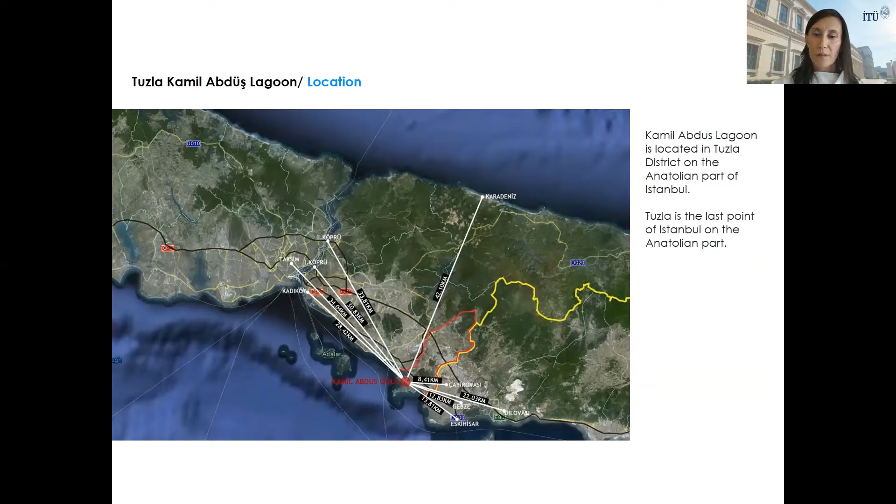So I will start with the location to understand the site better. Kamil Abdüş Lagoon is located in Tuzla district on the Anatolian part of Istanbul. Tuzla is the last point and the periphery of Istanbul on the Anatolian part. You know that Istanbul is a two-sided city. So actually it's a really special lagoon, which is one of the few lagoons in Istanbul.

But after the building of Tuzla shipyard just next to the mouth of the lagoon in 1978, and the change of the bed of the stream which provides fresh water for the lake, it quickly lost its ecological values, and the lake dried up in, unfortunately, 2003. That's why this area is a lagoon filled only by seawater, and it's struggling to survive despite all the environmental problems it has experienced.

And the other important issue is related to this lagoon, the lake. The lake is on the bird migration routes, so it's a frequent destination for birds. That's why one of the most concerning parts of this project is this bird population. But after the shipyard was built, the number of bird species observed in the lake decreased from 45 to 22.

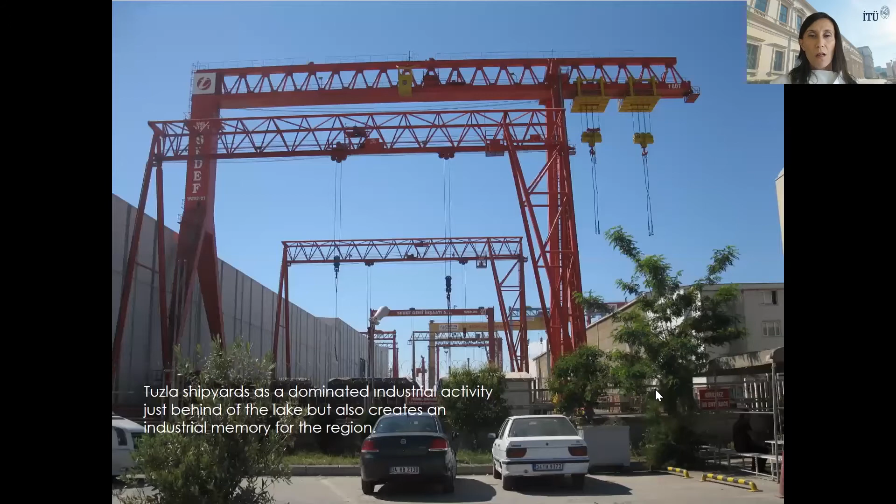I put some photos from the site to understand the condition better. Just behind the lake, you see the Tuzla shipyards as a dominating industrial activity. This industrial activity creates unecological conditions, but also creates an industrial memory for the region. So in the design process, we used this industrial memory as a design input, which I will show you later.

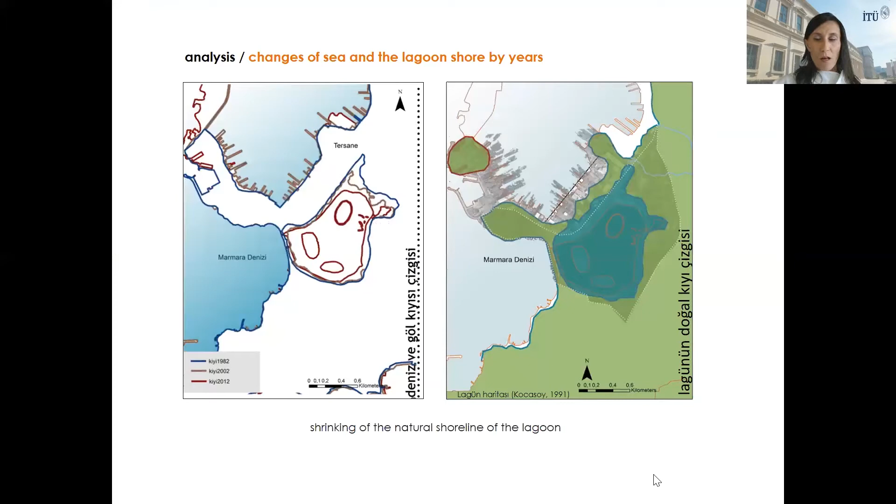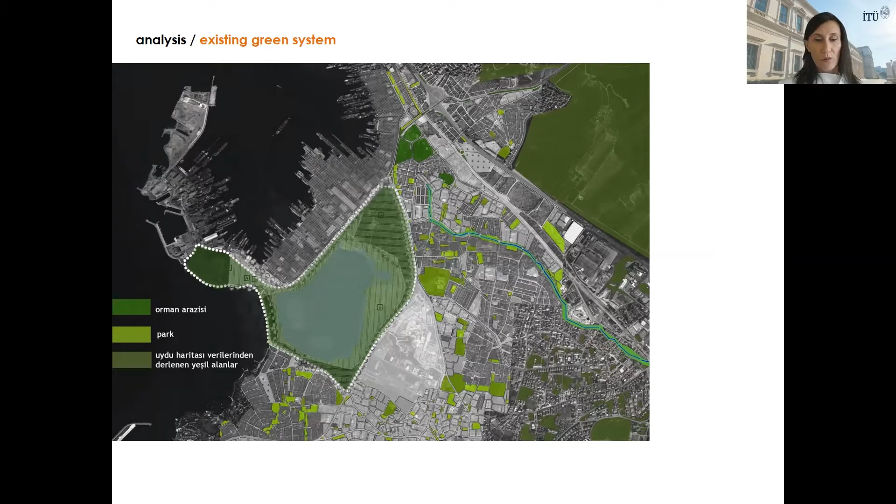After many detailed ecological, social, and physical analyses, we designed decisions and zones. In order to rehabilitate the lake ecosystem, it was necessary to understand the entire green and blue infrastructure of the surrounding environment. That's why we created a green infrastructure proposal based on the hydrological cycles of the area, which will ensure the sustainable preservation of the ecological values of the lagoon in the future.

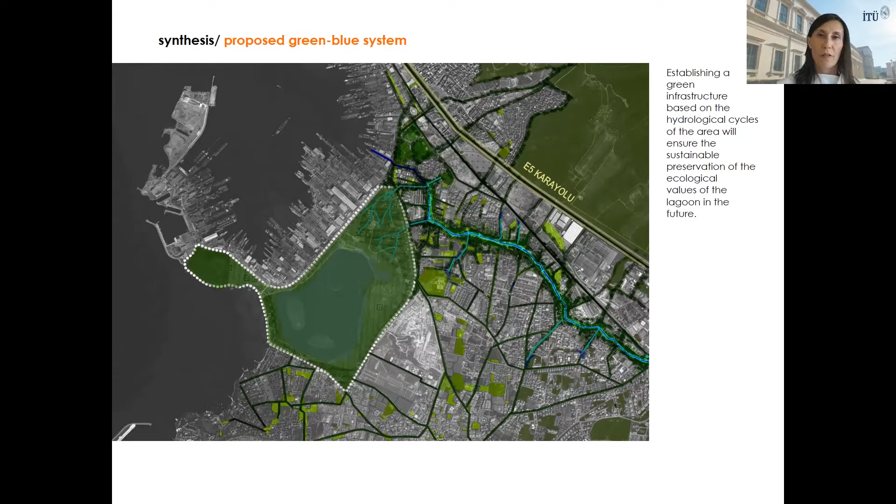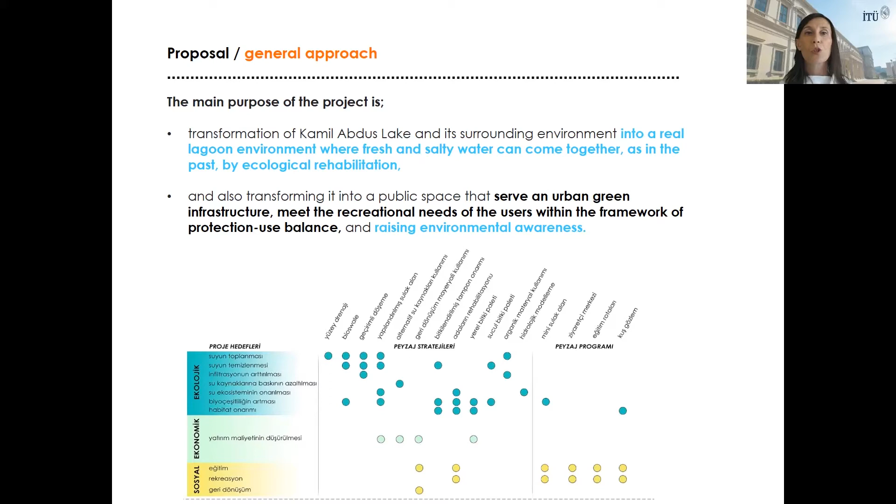As a general approach, we propose the transformation of Kamil Abdus Lake and its surrounding environment into a real lagoon environment where fresh and salty water can come together, as in the past, by ecological rehabilitation. But we would also like to transform it into a public space that serves as urban green infrastructure, meets the recreational needs of the users within the framework of protection-use balance, and raises environmental awareness.

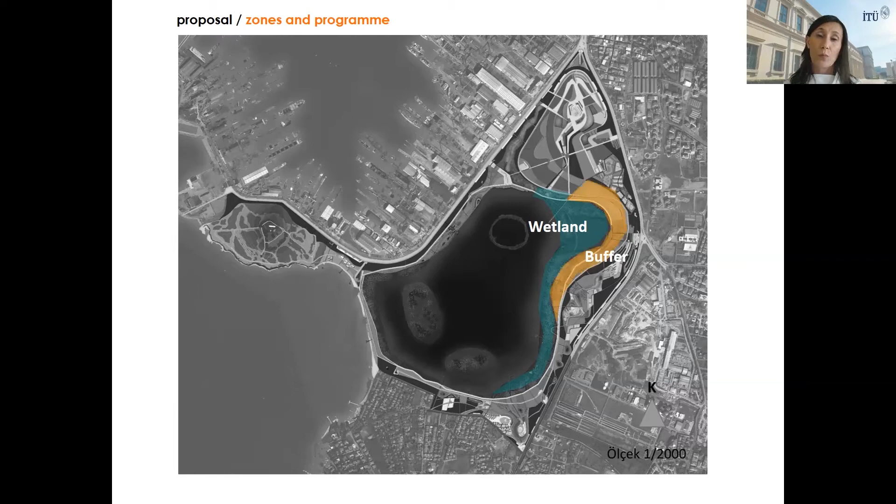So after that, we created the design zones according to this analysis. The most protected zone is here, the wetland, of course. We protect the wetlands, and then we create a buffer zone to protect these wetlands. And then we put maybe the most active part of this project, the park, after this buffer zone. And then we create different park types according to user profile.

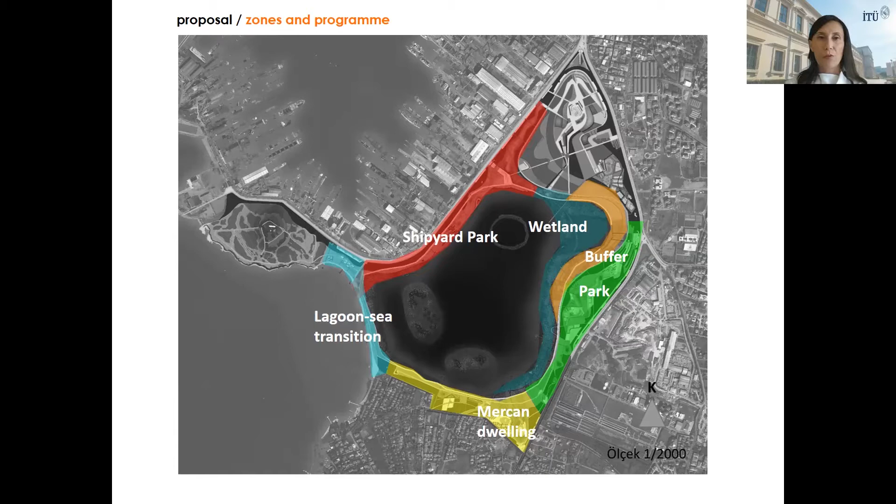For example, Shipyard Park is mainly for the shipyard users and workers, and Mercan Park is for the Mercan dwelling users. The other important part is the lagoon-sea transition part, because here is where the salty water enters the lake, and we worked with the environmental engineers. And the other most natural part is Pistacia Island, because there are lots of old Pistacia trees here. That's why this island is under protection.

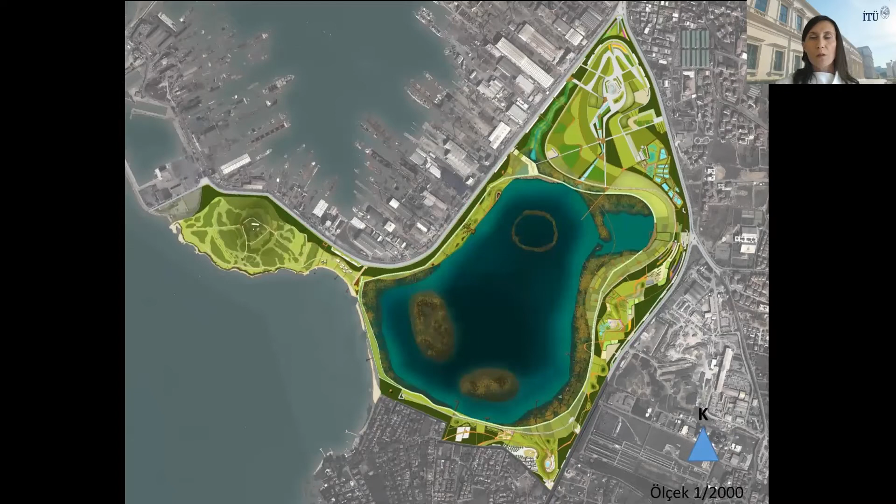The square is the most built and the most active part of this project. And the bird islands: these islands are just for birds, no human use allowed. And here you see the 1/2000 master plan of this project.

One of the most important issues in this project was water management. With this system that you see in this image, we have both cleaned the water and provided the balance of fresh and salty water. That's why we created different types of water management systems, such as infiltration, stormwater management, water collecting canals, and bioswales to collect and rehabilitate the water.

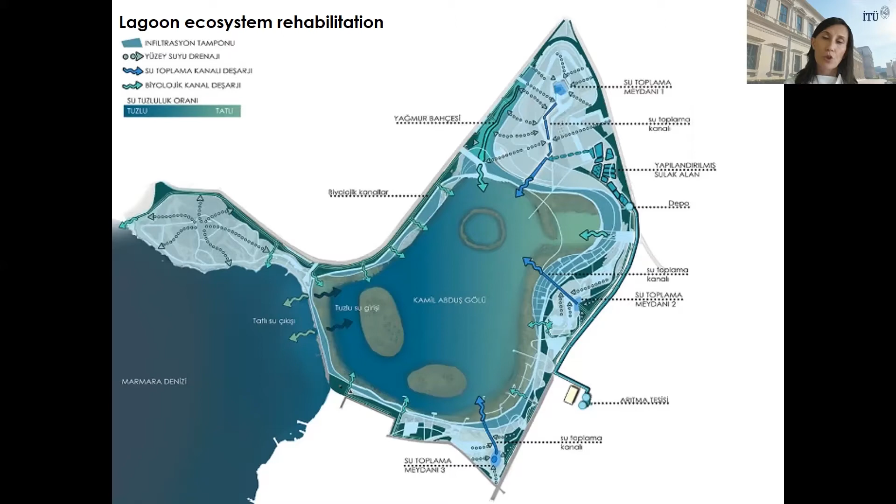So we combined all these different systems in one water management plan, to clean and then recharge the cleaned water to the lagoon ecosystem. Maybe the most important part of this water management system is the constructed wetland. Here we transfer the water, clean it, and transfer the clean water to the area. Here you see the zones of this cleaning system.

In zone 1, there are sedimentation and ventilation pools. In zone 2, heavy mineral decomposition pools, and zone 3, nitrate decomposition pools. In zone 4, the water is totally cleaned and conditioned, showing the clean water to the visitors. So the last one is the water show area, where visitors can see the totally cleaned water.

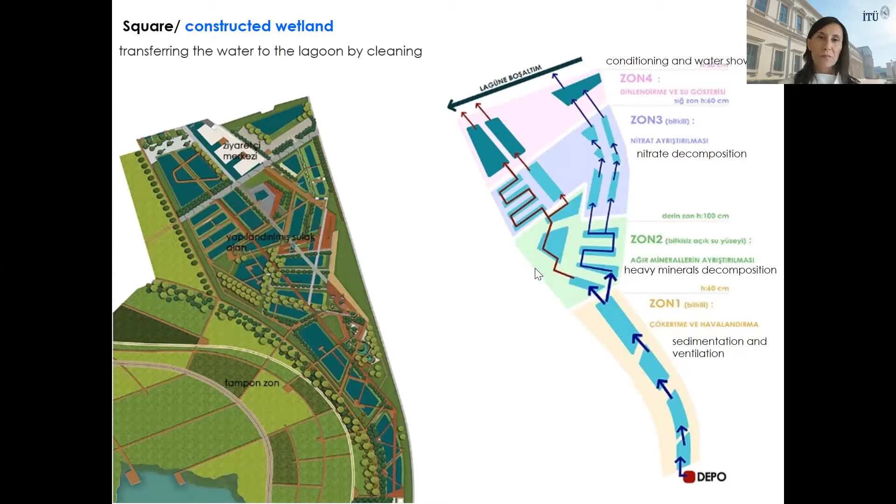The other important thing, maybe the most multidisciplinary part of this project, is that we created a hydrological model, thanks to hydrologists and environmental engineers. With this modeling, we try to balance the salty and fresh water amounts in the lake.

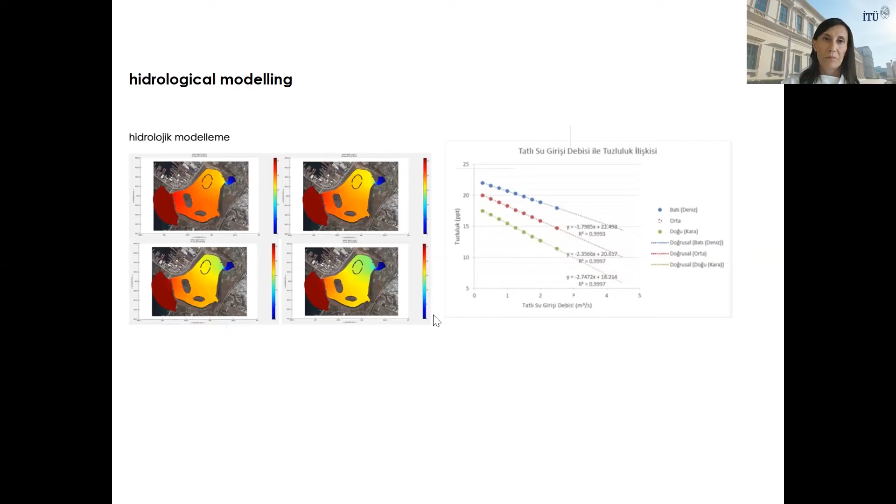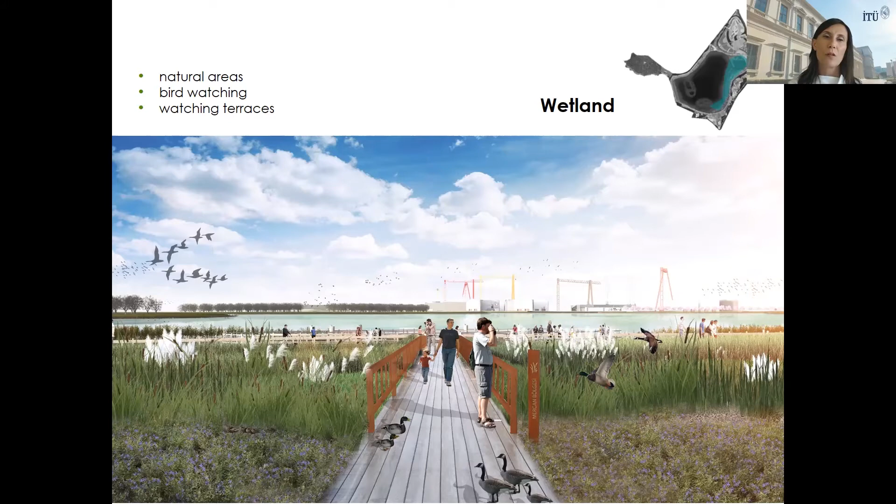Here you see the programs of the park in different zones. Now we can pass through these zones with the images and the programs. Here is the wetland part, the most protected part. This part is just for birds and the natural wetlands. So there are some natural areas for birds, and then we created some bird watching areas. Visitors can come and watch birds from these terraces.

The other part: remember that after the wetland and buffer, we created a more active park. The most important theme here is recycling, because of the industrial activity here there are lots of unused industrial materials, and we recycle them and use them in the park. Here the program is more active: you see in the list thematic gardens, resting areas, thematic meadows, cafes, restaurants, kids squares, sports areas, and cycling, running and walkways.

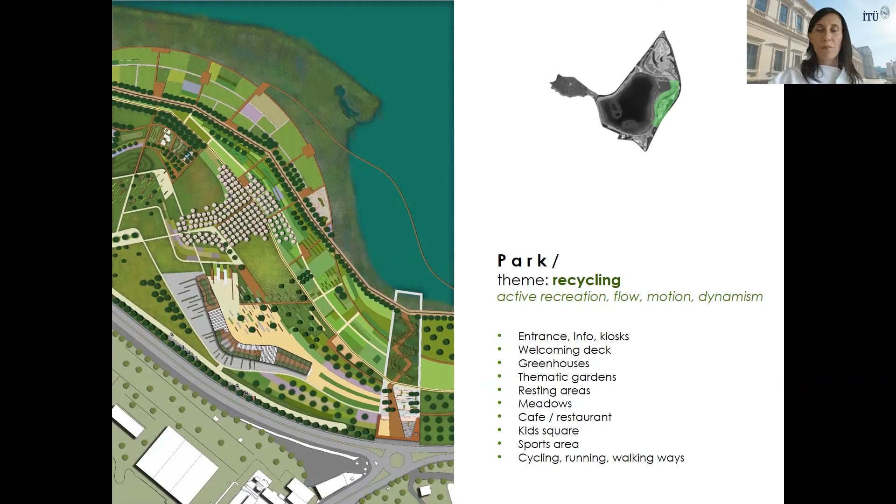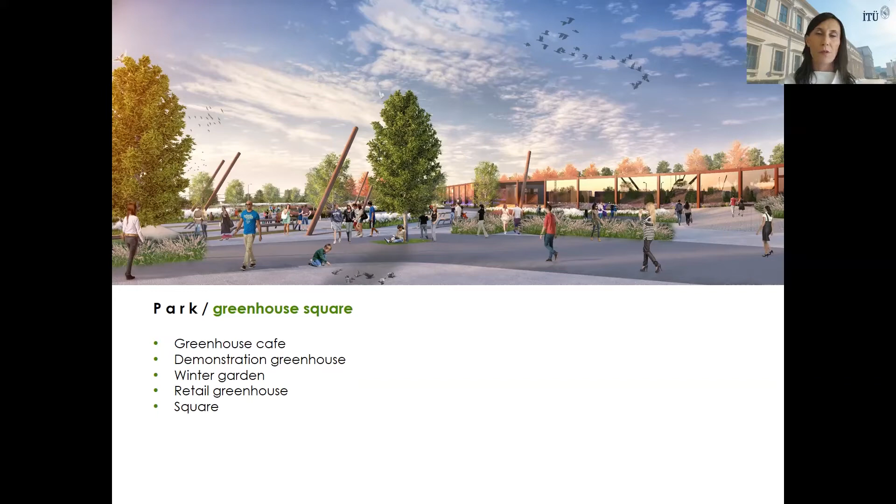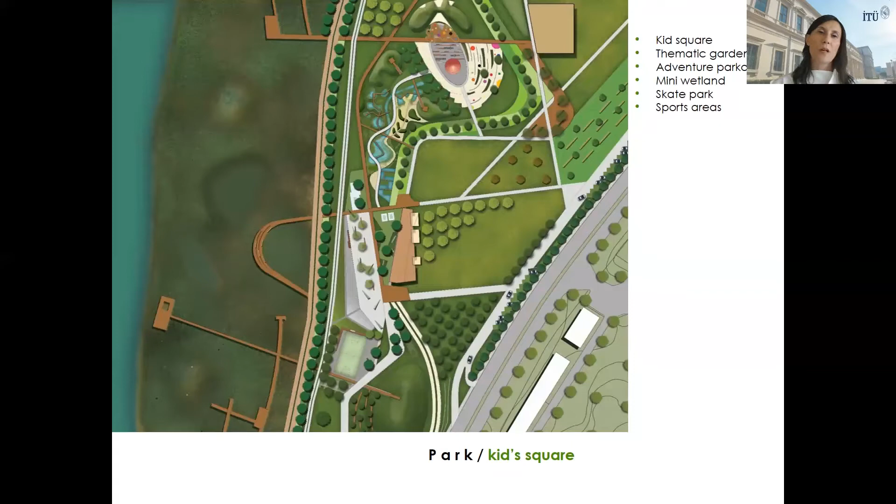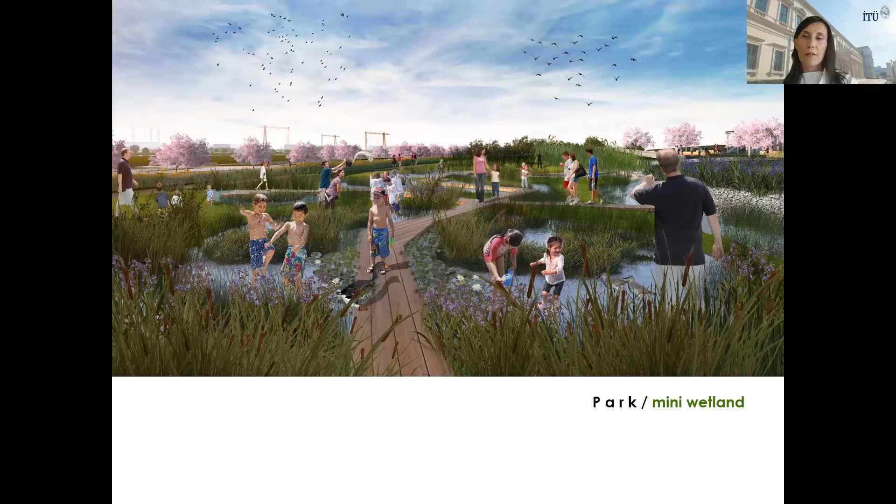Here you see the kids square, consisting of some thematic gardens, adventure parks, mini wetlands, a skate park and sports areas, because it's one of the most active parts of this park. In order to understand and rehabilitate the lake ecosystem, it was necessary to understand this whole system. That's why we create real mini wetlands to raise ecological awareness and promote wetland ecology for children in the kids area.

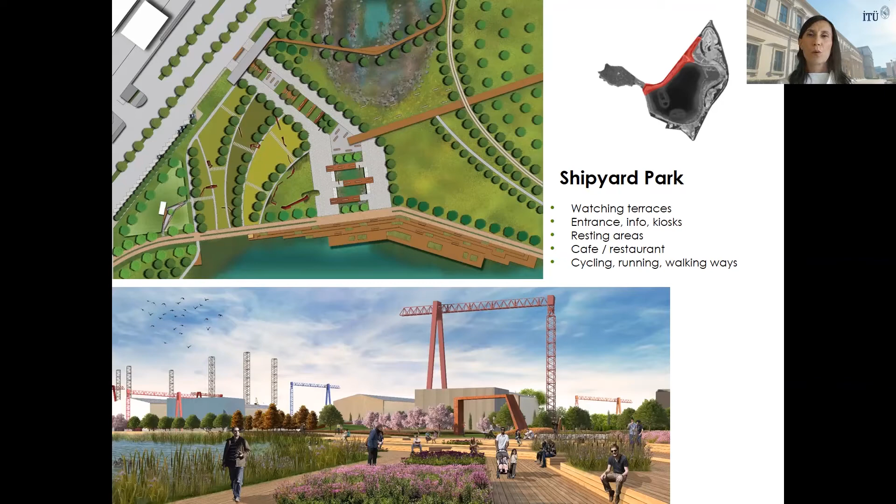Another zone is the shipyard park, just next to the Tuzla shipyard. Here is calmer than the active park zone because of the user profile. So we program here watching terraces, an entrance info kiosk, resting areas, cycling, running, walking, and maybe some small cafes and restaurants.

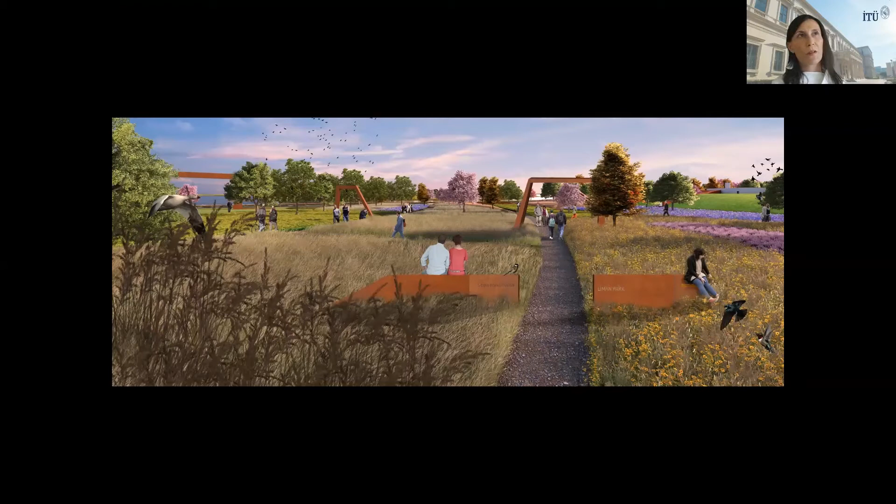Yes, this is the industrial memory that you can see in the park identity. We use recycled materials, corten or some shipping materials, on the site, keeping this industrial identity and memory on the site. You see some natural playground images here in Shipyard Park.

And the other zone is the Mercan dwelling park. Here is a kind of two-story dwelling. So we create some small area for this dwelling, because the whole site is quite big, and we should create different zones in the park for different user profiles.

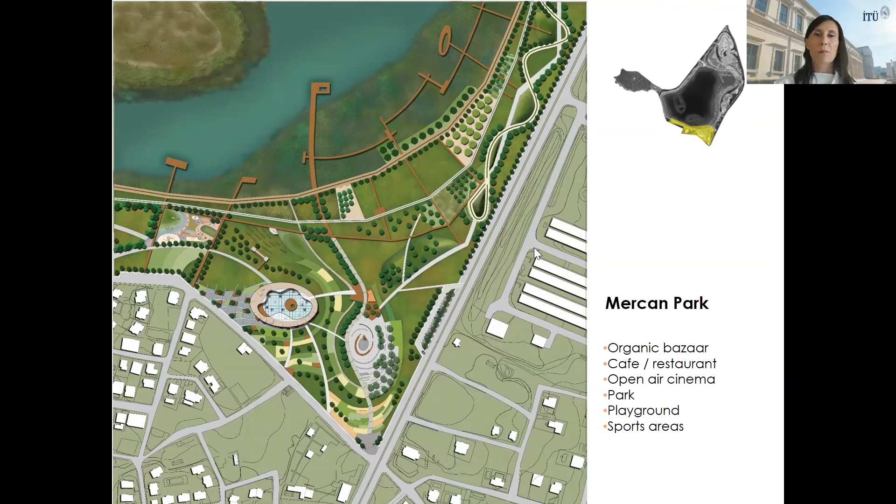In Mercan Park, you can see the classical park functions, but we also create some organic bazaar functions because of the old greenhouse cultivation here. Mercan users are quite familiar with buying organic foods. That's why we create an organic bazaar here, and cafes, restaurants, and of course some classical park elements, playgrounds, and sports areas. Here is the Mercan Park Square and the organic bazaar shelter.

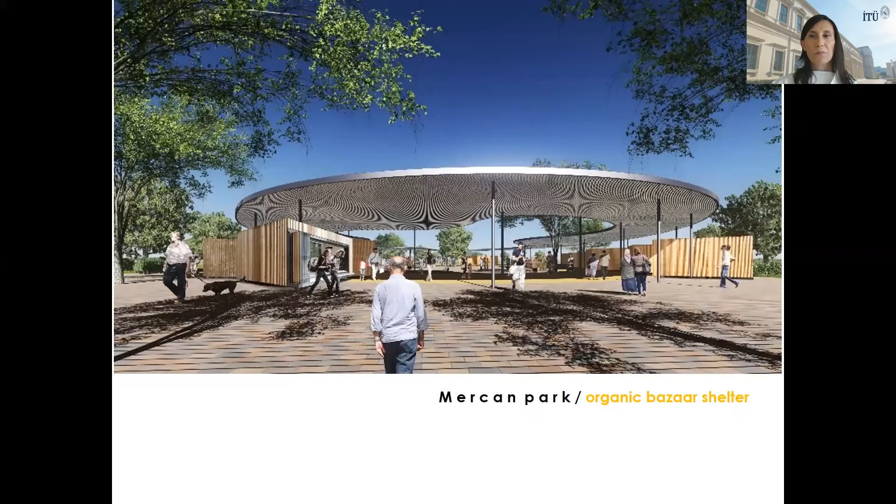This part is the crossing part of the lagoon and the Pistachio Island part. Here we work with the environmental engineers because of the balance of the mouth of the salty water entrance to the lake. So it's kind of an engineering project, but of course we also join this part as the recreational part.

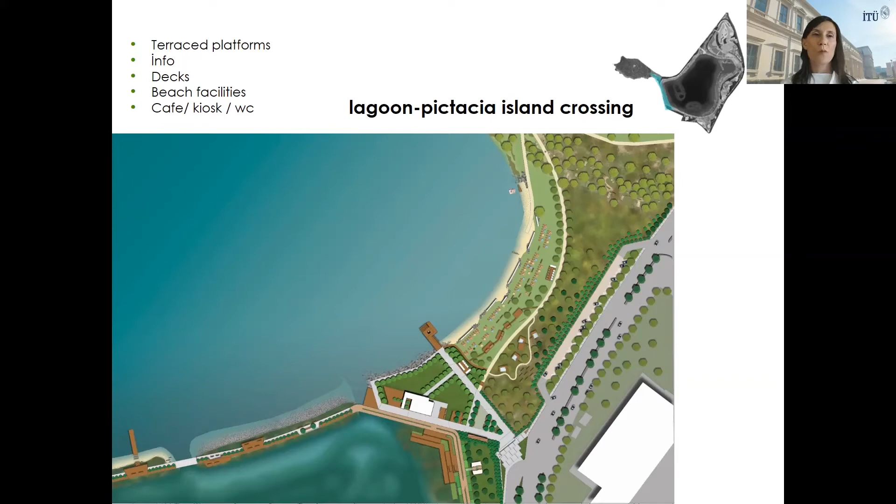So we create some beach facilities because there are old beaches in the island park, and also watching terraces, cafes, toilets, observing decks, etc. But normally it's an engineering project because of the hydrological modeling and the balancing of these lagoon mouths. And you see here the resting platforms in this crossing area. Some images from the park design.

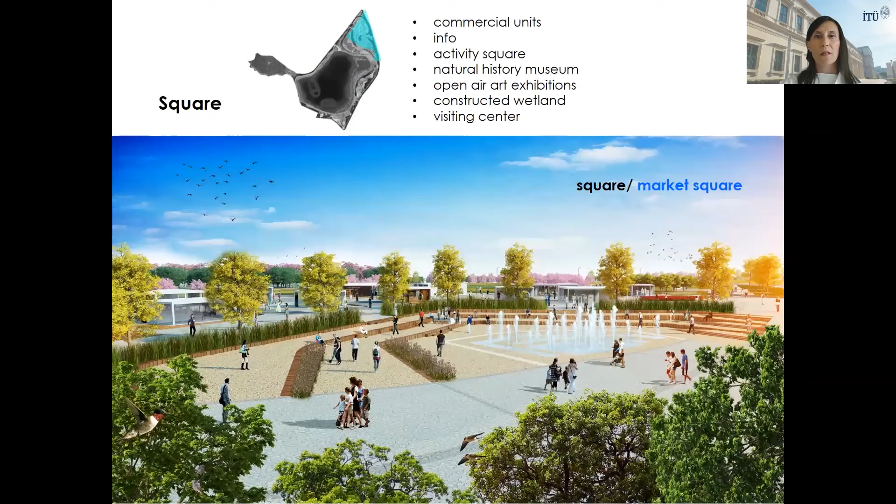Here is the most active part of this project, because of the protection status of the park. Here is maybe the less protected part of the site. That's why we put the most active functions in this area, such as an activity square, a natural history museum, open air art exhibitions, the constructed wetland that I showed you before, the visiting center, etc.

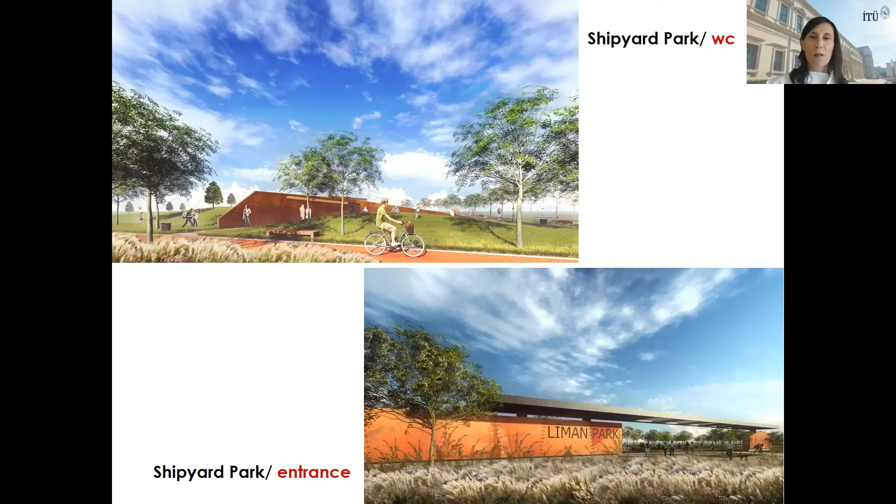And the last one is the bird islands. These are just for birds. We made an ecological restoration here and put some perching units and insect hotels. Human use is not allowed here. And here you see some architectural buildings and facilities, such as the park entrance, toilets, info buildings, beach facilities, cafes, etc.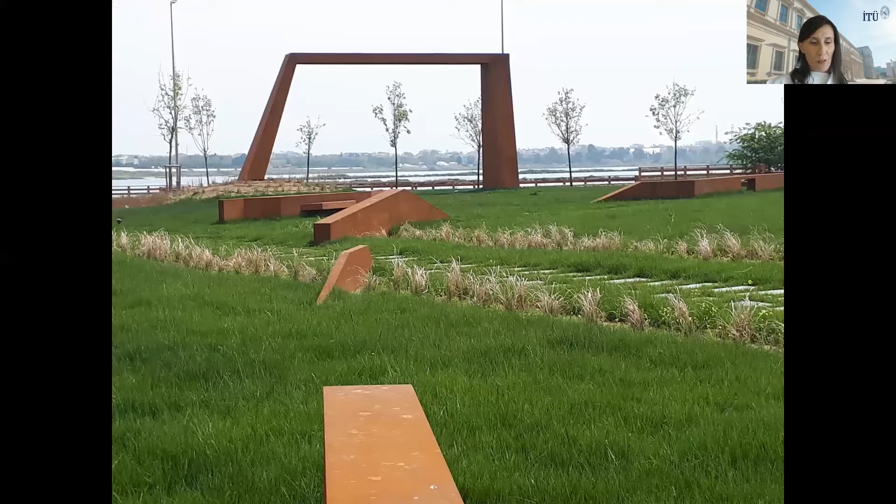Last year, the first phase of the project was implemented, so you see photos of the implemented parts here. These photos were taken last year. Day by day, it's developed. Here you see the realized part of the bioswale area, and we're quite proud of implementing this bioswale. Now it collects rainwater, cleans it, and then we recharge the lake.

Yes, actually the most pleasing part is that flamingos are back, because after the shipyard was built, flamingos stopped coming to the lake. But for the first time in a long time, they were seen in the fields on the site last year. So that's maybe the most pleasing part of this project after the implementation. So we hope that the other parts of the park can be implemented in the next years.

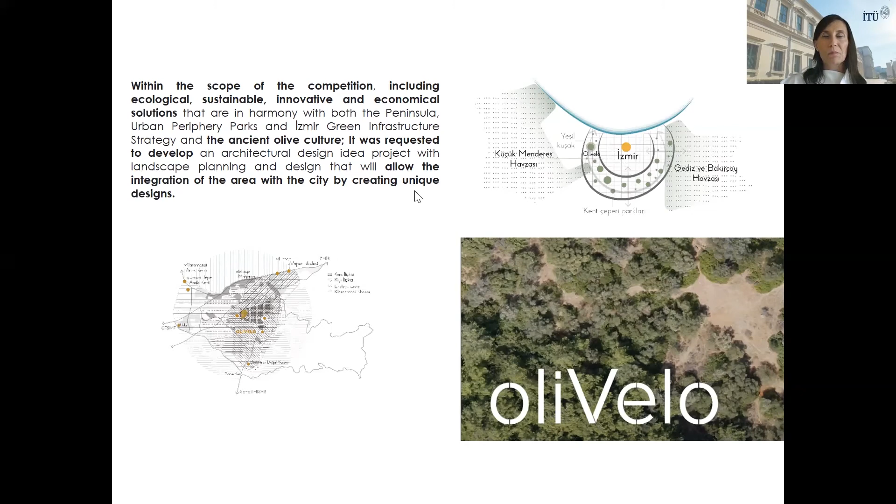Our conceptual approach was inspired by the cell mechanism. That's why we named this approach Selectively Permeable Interface. What is selectively permeable? It allows activities, processes, and inputs that feed the biological, genetic, and production cycles of the area and prevents negative impact factors. This system refers to the cell membrane, because the cell membrane directs the movements of molecules in or out and has selective permeability. The cell membrane is the boundary between the inside and outside of a cell. It's two-layered, lively, and selectively permeable.

So this cell system is quite similar to the site system itself. That's why the main inspiration here is this natural system.

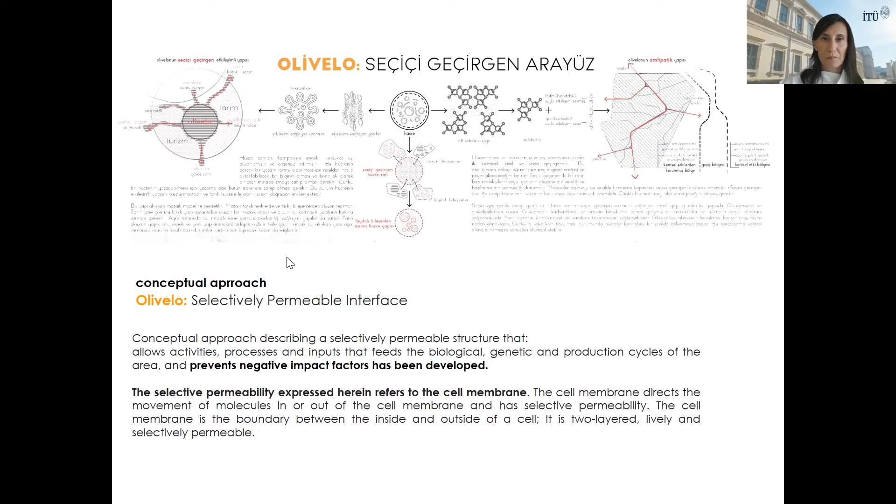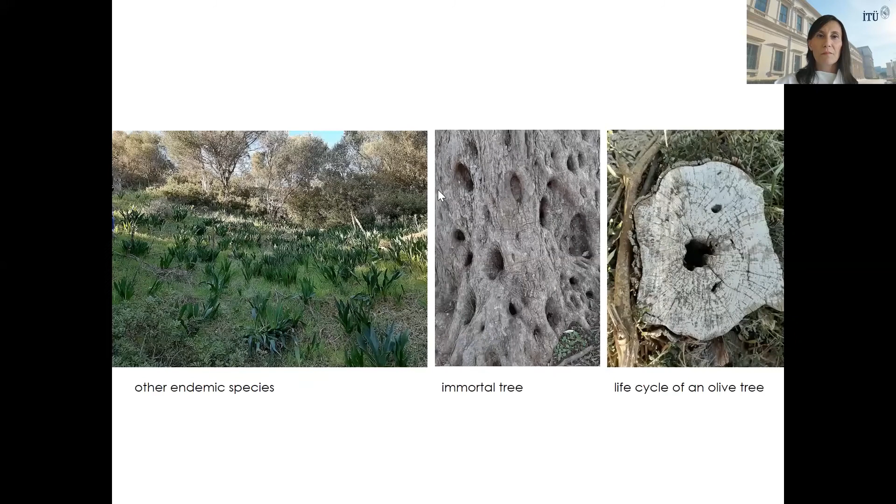Sorry, yeah. So with a perspective that sees the landscape as a socio-ecological system, the project has constructed a socioeconomic cyclicality that can be in dialogue with the ecological structure in the area. According to this idea, we developed three important structures and keywords. The first one is information transfer, the second is experience, and the third is circularity of production.

According to these three important keywords, we determined the actors that we used to decide. The first actor group is those who work in the fields, the second those who use the fields, and the third those who learn from the fields. So these three actor groups are quite important for the design development.

In the landscape design, we aim first to protect the ecological values of the area and to repair the destroyed features, and to design a durable and productive landscape, both as a process and physically, which can adapt to any environmental conditions that may occur in the future. With the point of view of selective permeability, our main title, and cyclicality, four basic regions that interact with each other are defined: active use, interactive use, production-based use, and passive nature. Sub-uses of the four basic regions have also been determined for the park program.

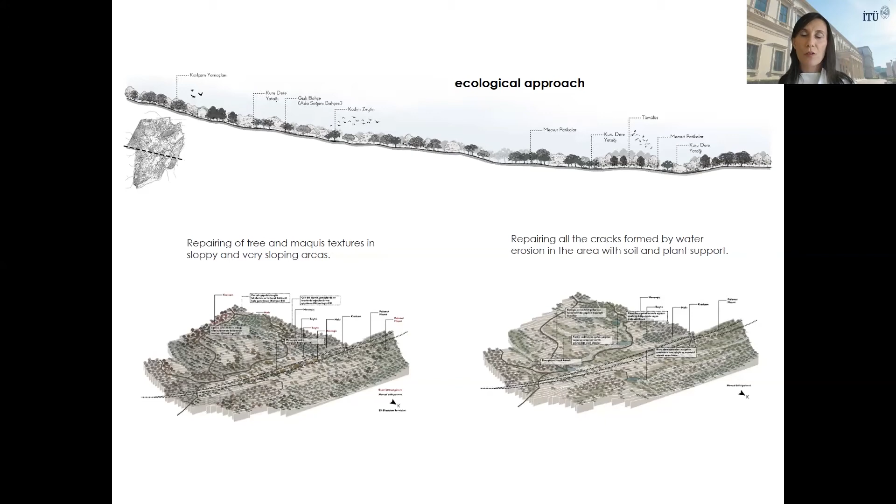And you see here the ecological approaches on site. One of the first things is repairing tree and maquis textures in slopey and very slopey areas. And the second, repairing all the cracks formed by water erosion in the area with soil and plant support.

Oh, sorry. Also, we create some wet activity areas. We collect water, and then also we allow that these wet areas can be used and observed or watched in the park program.

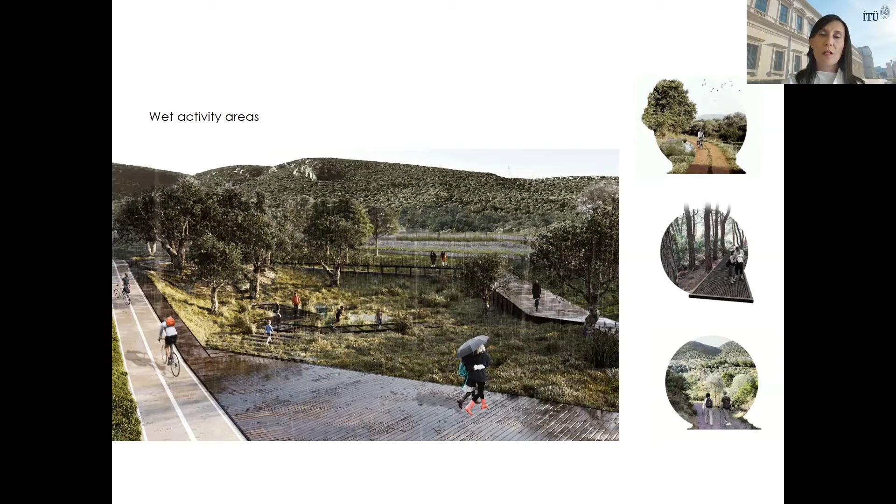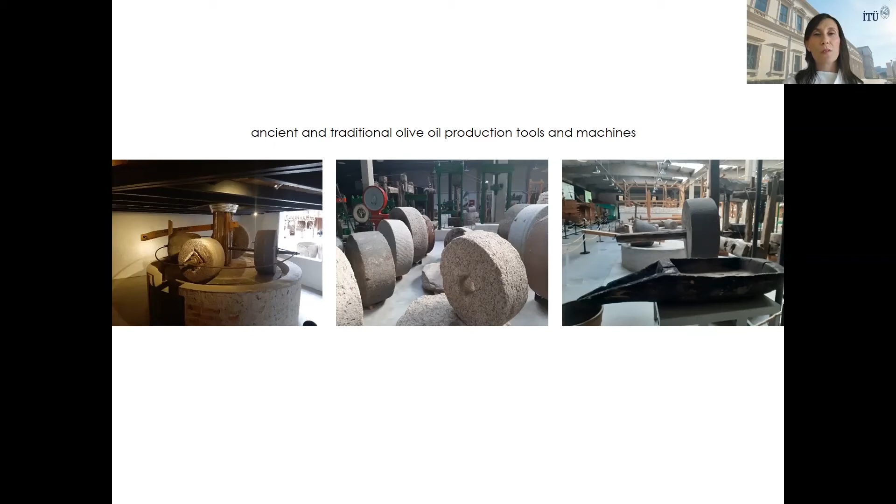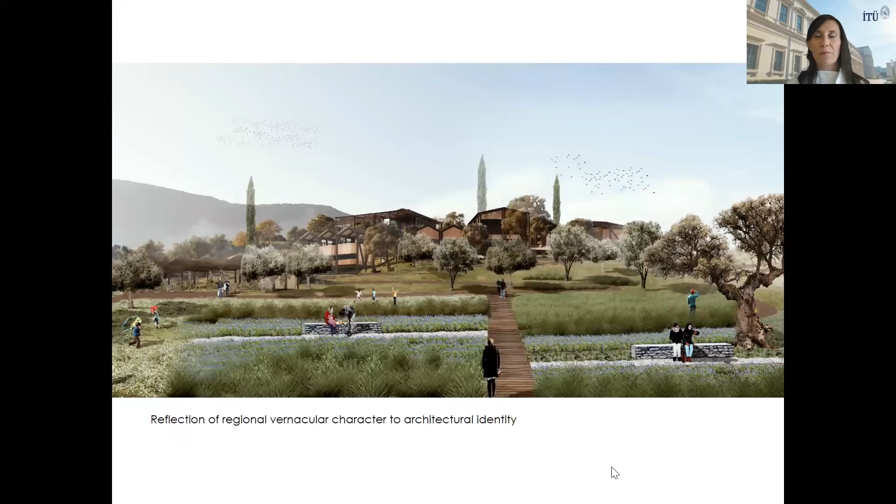Yes, these are the architectural characteristics, and the reflection comes from the regional vernacular character. The architects use this vernacular character to create their architectural identity. So you see that the buildings and the whole eco village are like a kind of Aegean village.

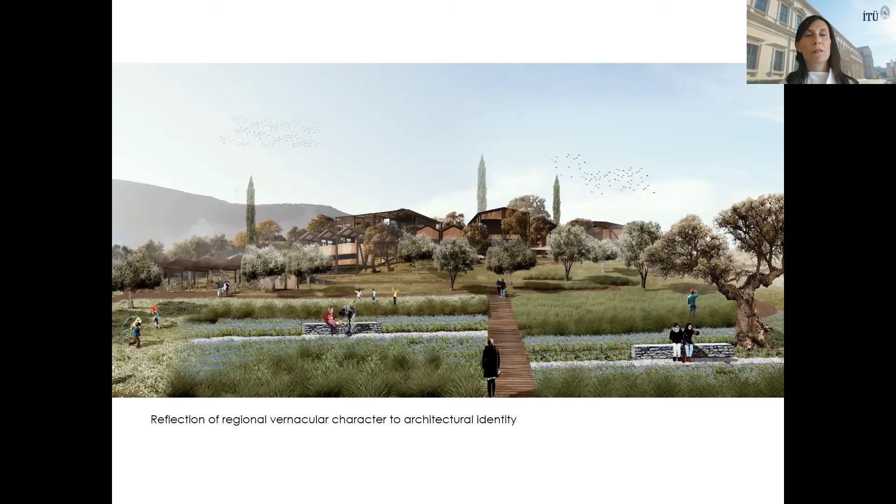Yes, if we have time, Fatih, I would like to, yeah. Actually, we have just 1 minute. 1 minute, okay. So I would like to show this animation, but if we don't have time, it doesn't matter. Yeah, you can start. I think it's a short animation, right? Okay. Just a minute.

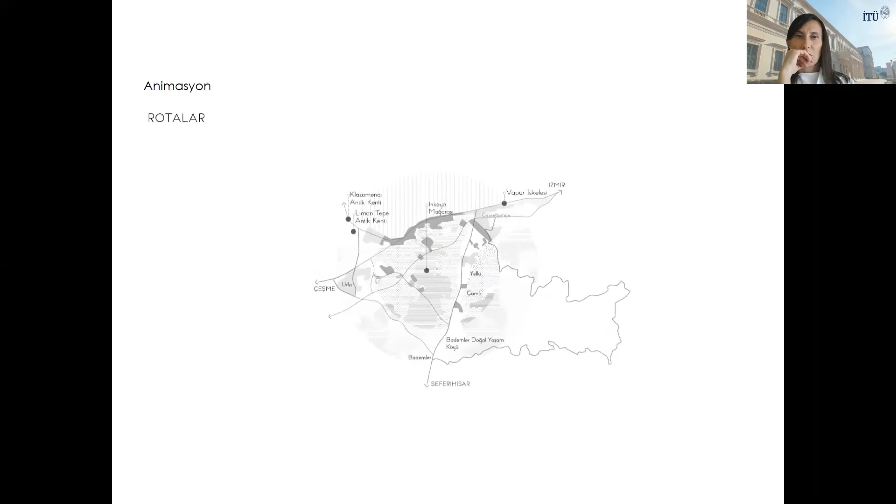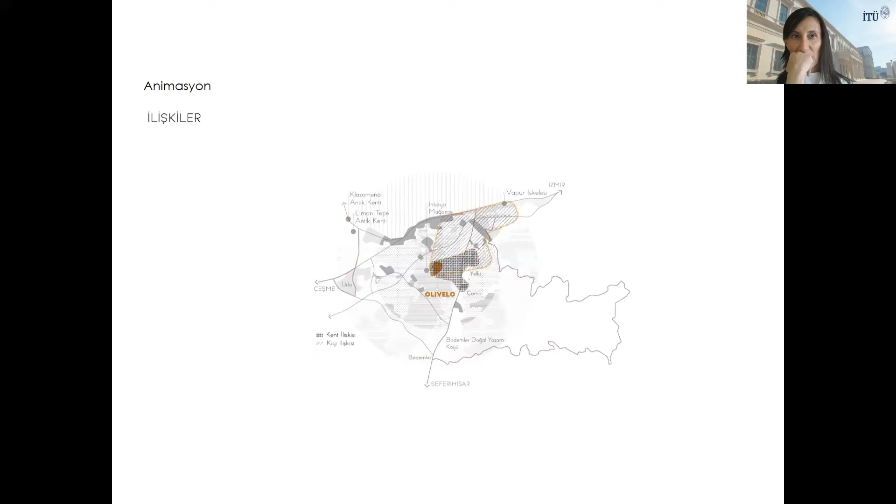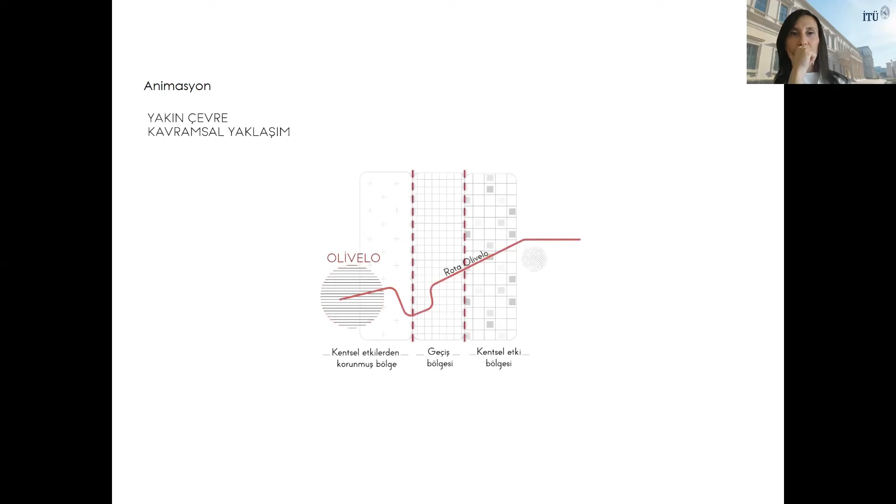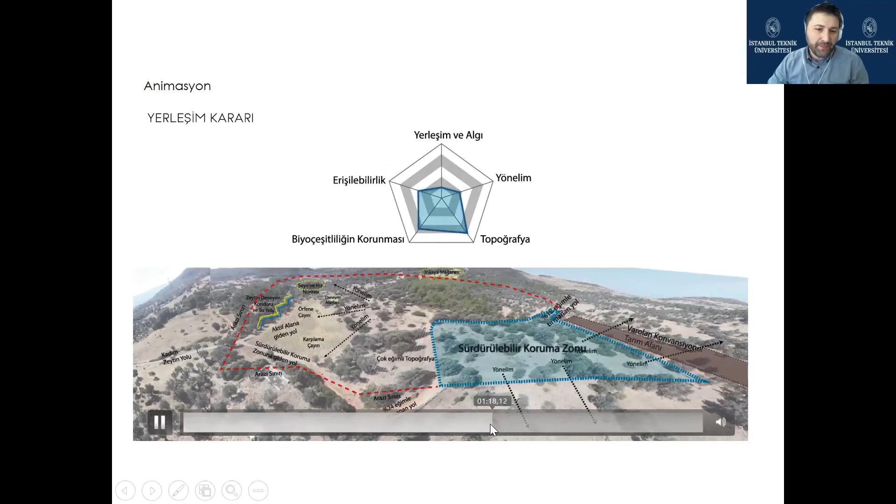Sorry, it's Turkish, of course. Okay, maybe we can stop the animation, because we already exceeded 5 minutes.

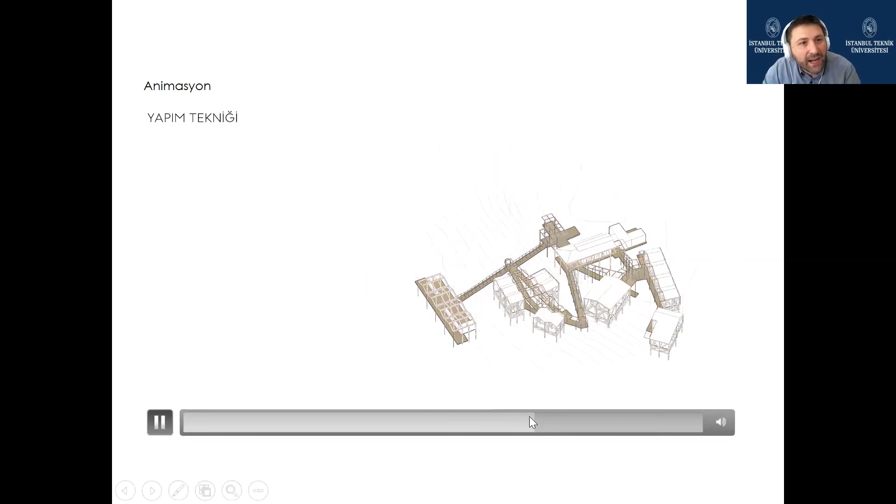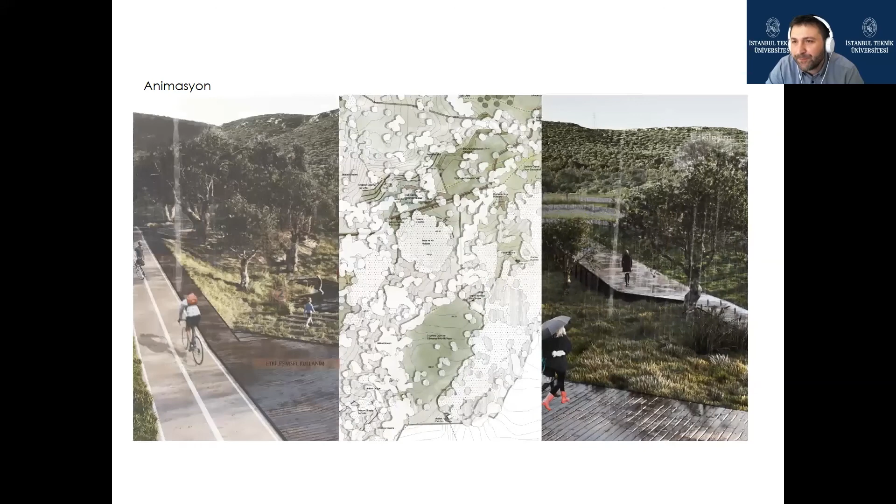Thank you very much. It was very interesting and included good examples of how ecological design principles can be reflected in practice. And we have almost 10 minutes for questions. Are there any questions? I am now looking at the participant window.

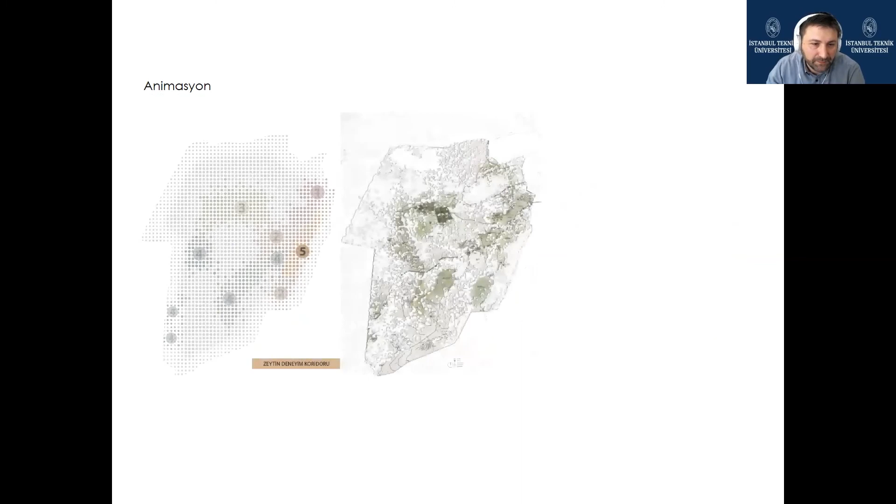Yes. So I can stop maybe, yeah. And also, I am happy that flamingos are back. Yes. Yeah, I'm looking for any questions from the participants.

I'm just wondering, for the lake projects from Tuzla, Kamil Abduş Lake projects, according to your experiences, what was the most challenging part in the design process? Because it includes many stakeholders, it has different characteristics, and also there are some regulations and management parts. What do you think about that?

Yeah, in the design process, maybe the most challenging part was to convince the authorities, especially the main authority, the municipality, and the supporting authorities such as those related to water issues, of the usefulness of these ecological strategies, especially the water strategies. Because you know there are not so many implemented examples here in Turkey. So they doubted whether it can be useful or not. Sometimes the first implementation costs can be expensive.